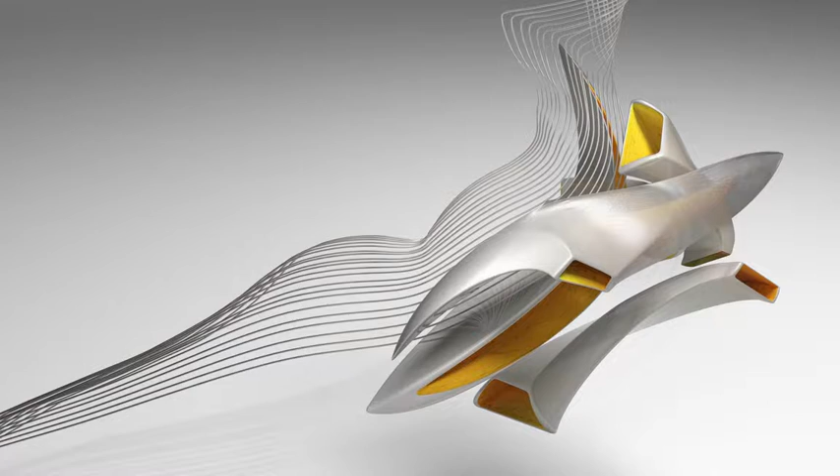One of humanity's greatest challenges has always been to understand and harness the power of the elements, the strength of wind, and the force of water. This quest inspired history's greatest minds to develop the science of fluid dynamics and its equations. These equations are nothing short of genius and extremely difficult to solve. They're so complex, in fact, they cannot be solved by hand.

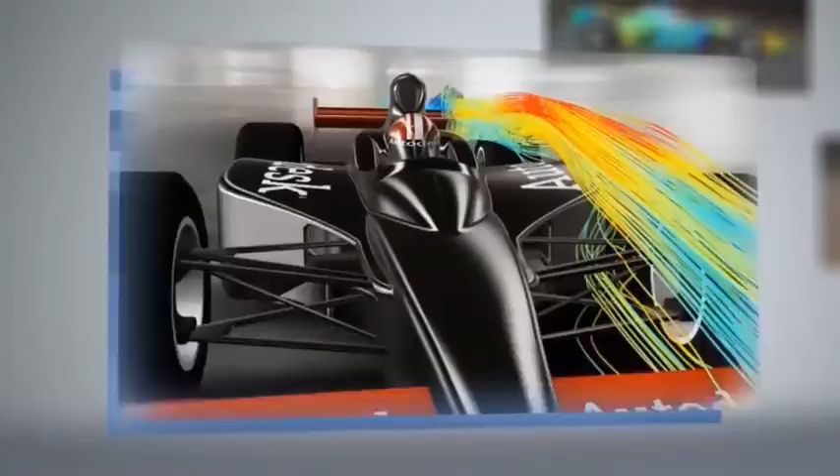This all has led to a software revolution that uses methods and algorithms to predict how liquids and gases behave and how they work with the products we design. In the design world, we call this computational fluid dynamics, or CFD for short.

Fluids affect the performance of almost every widget, device, and structure. CFD is an important part of the design equation and helps boost energy efficiency, reduce risk, and spark innovation. Fluids are always a serious factor.

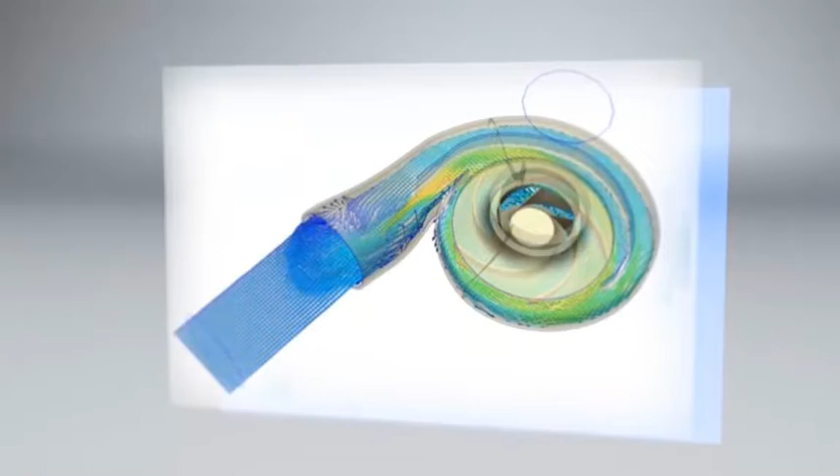It takes energy to move a car down the highway or to pump water through a pipeline. By understanding the forces and effects of fluid dynamics, you can make the critical design decisions that reduce energy consumption and improve efficiency. Products, vehicles, and structures often fail due to miscalculations or judgment errors of fluid behavior.

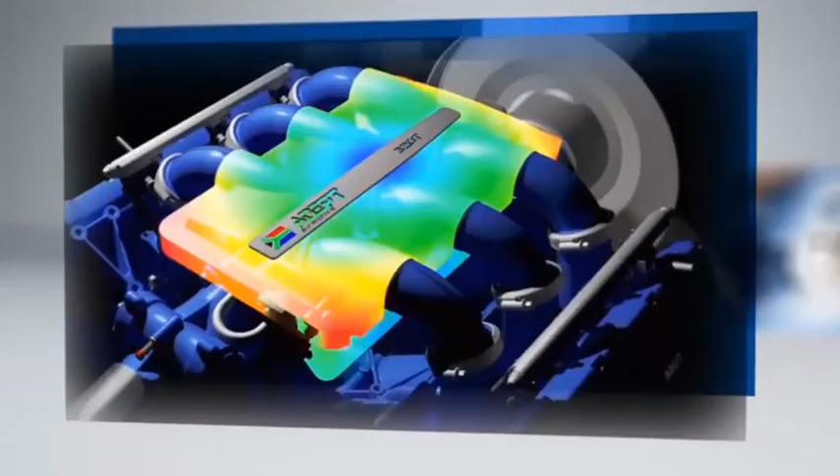We hear about these malfunctions all the time. Computers overheat, car parts fail, structures collapse in high winds. The result is recalls, lawsuits, or worse, loss of life. By running CFD analyses throughout the design process, you can solve these issues before they turn into serious problems.

Costly physical prototype testing provides discrete pieces of test data. CFD analysis shows you the complete view of the flow. This insight inspires questions and critical thinking that produce innovative design.

Fluid flow is the study of how liquids and gases move in and around solid objects. Heat transfer is the study of how things heat and cool and the cause of these temperature changes. With CFD analysis, you can understand the flow and heat transfer throughout your design process.

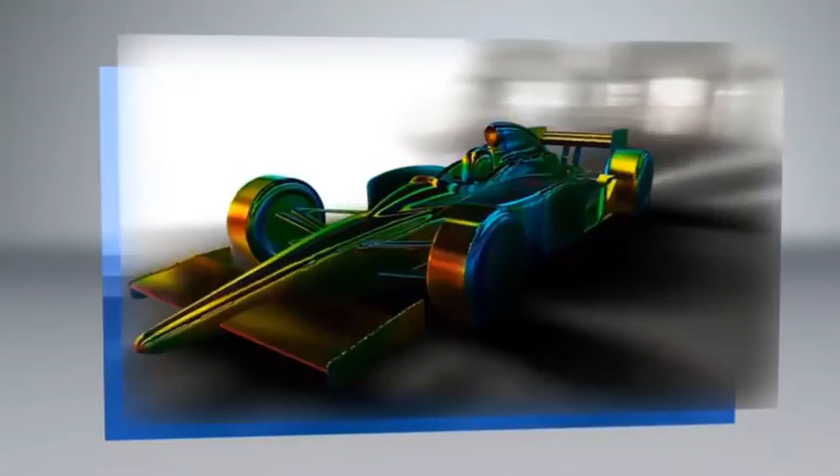A few examples include wind resistance of a car or motorcycle, pressure drop through a water valve, component temperatures in an electronics enclosure, comfort of people in a crowded meeting hall. And that's just the start. CFD analysis should be used throughout the design process to gain insight and to make good design decisions.

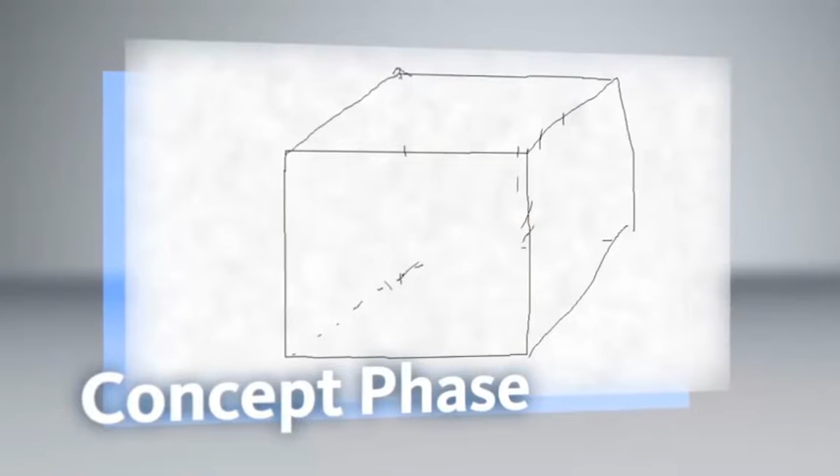Let's follow a project timeline with CFD. Let's say you get an assignment from a client and right away you have an idea, a seemingly groundbreaking solution. You think it will work, so you mock it up and run a CFD analysis. You learn some things, you get precise information. You land on a concept that will drive the next big thing.

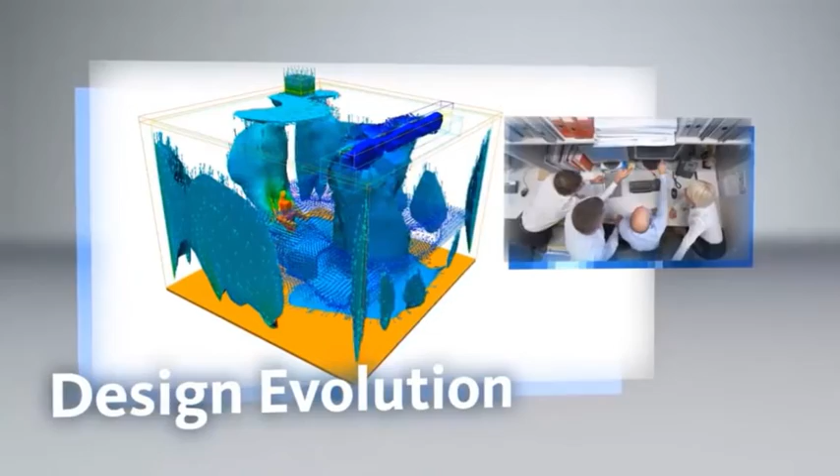As you work out the details, you must consider every question carefully. You iterate through each alternative and select the best. Each analysis unlocks a secret that will make your design better.

Finally, you analyze a detailed model to check that it all works as designed. You spot an issue, you fix it, then rerun to make sure it's fixed. The result is a high-quality product delivered on time. Your customers are happy and you're ready for the next big challenge.